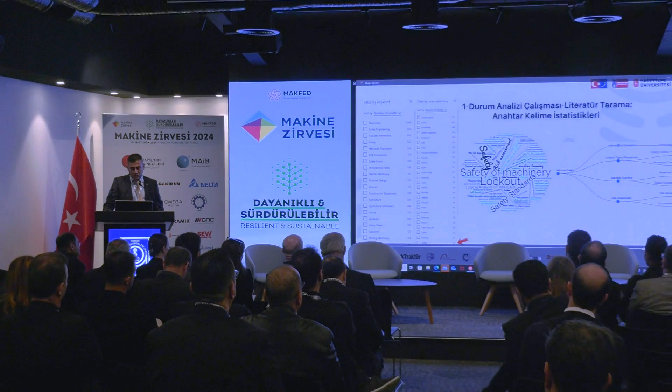Scopus verilerine baktığımız zaman makine emniyeti, emniyet mühendisliği gibi anahtar kelimelerin öncelikli olarak yer aldığını görebiliyoruz ve en fazla çalışmanın Amerika Birleşik Devletleri'nde, Çin'de ve İngiltere'de yapıldığını görüyoruz. Türkiye'de ise sadece 30 tane Scopus veri tabanına yansıyan çalışma var. Yani Türkiye'de bu konuda bilimsel araştırma anlamında çok az kaynak bulunmakta ve bu alanda çalışan kişilerin üretmiş olduğu yayın sayısı da çok az.

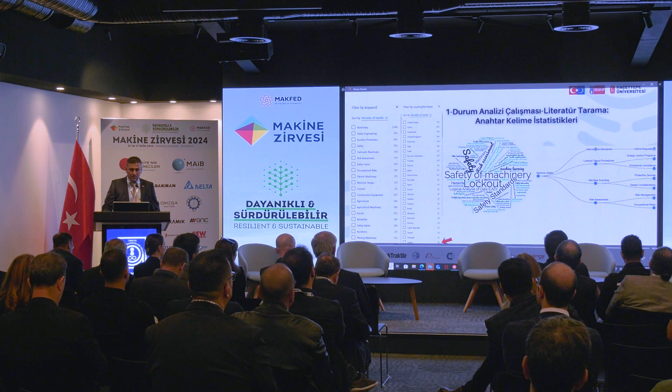Makine emniyeti başlığına baktığımız zaman mapping kısmında en çok lockout, tagout prosedürlerinin dikkat çektiğini görüyoruz ve peşinden risk değerlendirme geliyor. Yani risk değerlendirme ve lockout, tagout prosedürlerine bağlı olarak iş kazaları ya da makine emniyetinin daha dikkatli ele alınması gerektiği konuları burada dikkatimizi çeken konulardan biriydi.

Literatür taraması böyleydi. Odak grup toplantılarında da sanayicilerle yapmış olduğumuz toplantılara 21 firma katıldı. Bu firmaların %75'i üniversite mezunu, %21'i lise mezunu ve %4'ü de ortaokul mezunu katılımcılardan oluşuyordu, firma sahiplerinin eğitim durumuna göre.

Onlarla yapılan odak grup toplantısının sonucunda ortaya çıkan ana başlıklar şunlardı: Makine emniyeti konusunda sanayicide bir farkındalık var ama maalesef mevzuat bilgisi eksik. Yazılı bilgi ve düzenli eğitimlerde eksiklik olduğu ifade edildi. Çoğu firma Endüstri 4.0 ve makine emniyeti entegrasyonu konusunda deneyimsiz olduğunu belirtti. Dijitalleşmenin doğrudan katkısının sınırlı olduğu ancak eğitimle makine emniyeti konusundaki bilincin artırılabileceği ifade edildi.

Yine odak grup toplantısında firma sahipleri, butik üretim yapan firmaların Endüstri 4.0 entegrasyonunda kendilerini sınırlı gördüğünü ifade ettiler. Özellikle üzerinde durulan konulardan biri şuydu: Endüstri 4.0 iş sağlığı güvenliğini artırabilir ama önce temel iş sağlığı güvenliği problemlerinin çözülmesi gerekiyor. Eğitimin hangi türde olursa olsun önemli olduğu ama deneyime, pratiğe, görselleştirmeye, animasyon destekli eğitimle birlikte olmasının kendileri için çok faydalı olacağı ifade edildi.

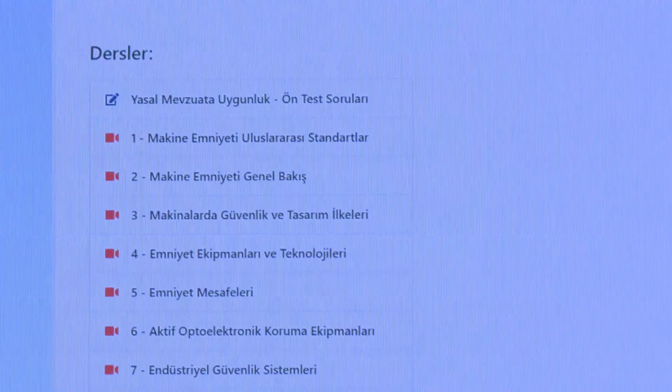Altta gözlük işareti olan eğitim içerikleri de var ama sayfa kaymıyor maalesef, internet biraz yavaş olduğu için en altta koltuklardan dolayı muhtemelen göremiyorsunuz.

Sunum kısmına geçeyim ben. Şuradaki gözlük işareti olan içerikler, bizim gerçek üretim ortamında Türk Traktör Fabrikası'nda kullanılan makineleri referans alarak birebir fotoğraf ve videolarını çekip modellemesini yapıp daha sonra oyun motorunda modellediğimiz sanal gerçeklik içerikleri. Ama buradakiler tabii ki sanal gerçeklik içeriğinin öncelikli olarak eğitim kısmı. Sonraki kısımda da sanal gerçeklik uygulamalarını alıp bireysel olarak da kullanabilirsiniz. Biraz sonra web sayfasından sanal gerçeklik içeriklerini nereden indireceğinizi ve hangi tür gözlüklerde kullanabileceğinizi de göstereceğim.

Burada şu anda eğitimi, bu örnek şu anda bizim interaktif eğitimlerden bir tanesinin ekranda videosunu görüyoruz. Makine, emniyet mesafeleri dersini anlattığımız eğitim içeriklerinden birisi. Bu da sanal gerçeklik eğitim içeriklerimizden bir tanesi.

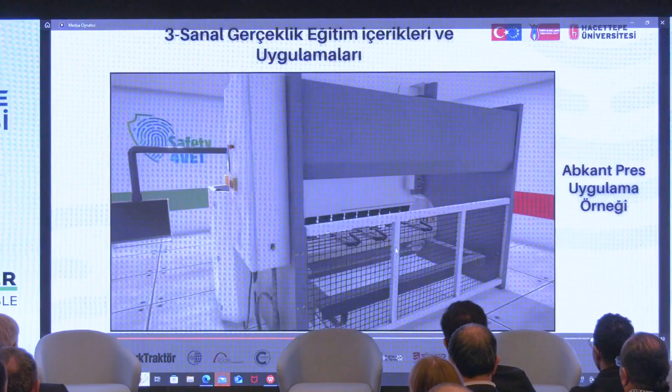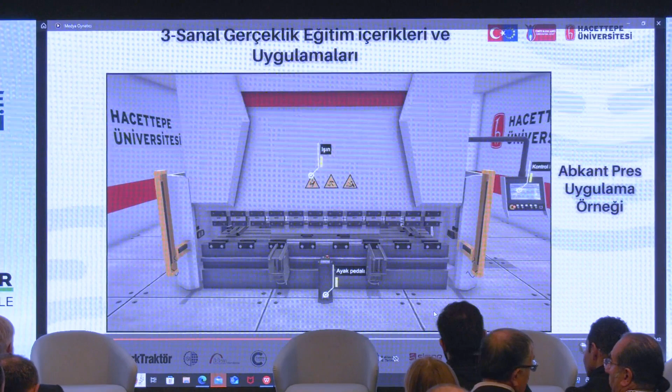Bu bir taraftan ekranda hareket ederken ben bahsedeyim. Şu an Türkiye'de üretilen Abkant preslerden birisi. Bu Abkant presin üzerinde hangi emniyet ekipmanları olması gerekir? Yine gerçek üretim ortamında kullanılan bu Abkant presin fotoğraf ve videolarını çekerek bunu bilgisayarda modellemesini yaptık.

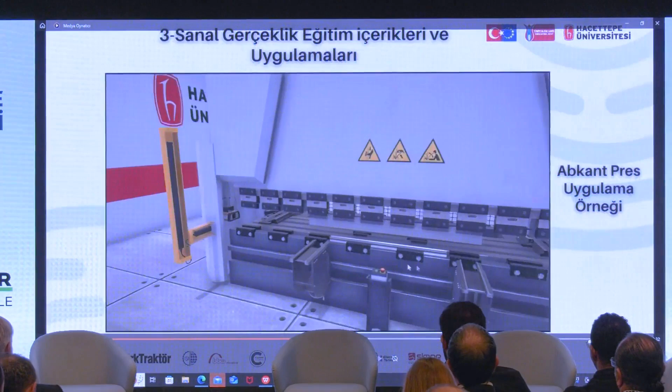Bildiğiniz üzere normalde Abkant preslerde bu şekilde ışık perdesi olmaz. Eğitim amaçlı olarak bunu biz entegre ettik. Gerçek makinede bu yok, burada gerçek makinede lazer emniyet sistemi var. Yani olması gereken bu ama biz tamamen eğitim amaçlı olarak buraya ışık perdesi de entegrasyon yaptık. Model üzerinde yaptık, üretici firmanın böyle bir entegrasyonu tabii ki yok. Ki lazer emniyet sistemi olduğu için buna da ihtiyaç yok.

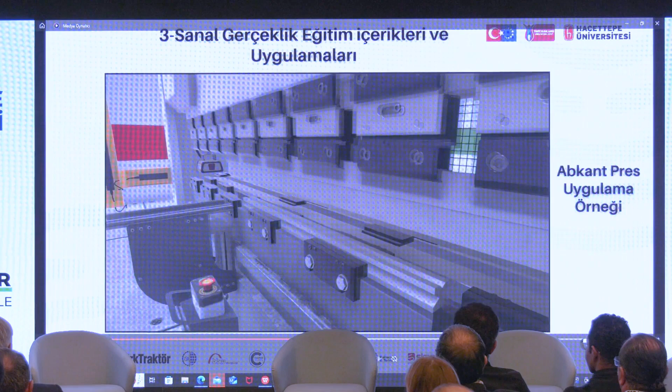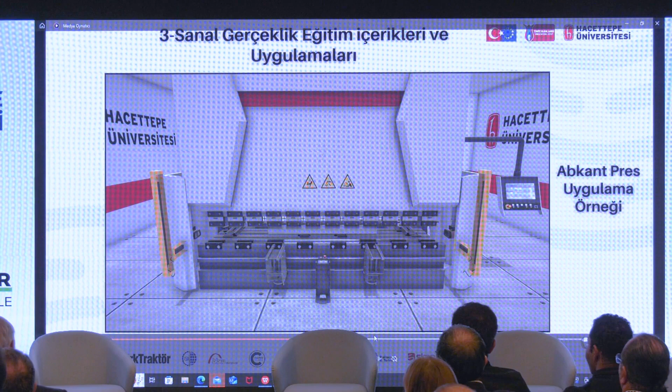Eğitim amaçlı tamamen. Dolayısıyla bu Abkant pres üzerinde daha önceki eğitimlerde bir pres makinesi üzerinde hangi emniyet ekipmanları olması gerektiğini anlattıktan sonra tekrar burada bu VR eğitim üzerinde adım adım bir daha anlatıyoruz. Hangi emniyet ekipmanları olmalı, bunların özellikleri neler olmalı ve makine üzerinde başka hangi koruyucu ekipmanlara ihtiyaç vardır, bunların hepsini bu VR içerik üzerinde de anlatıyoruz.

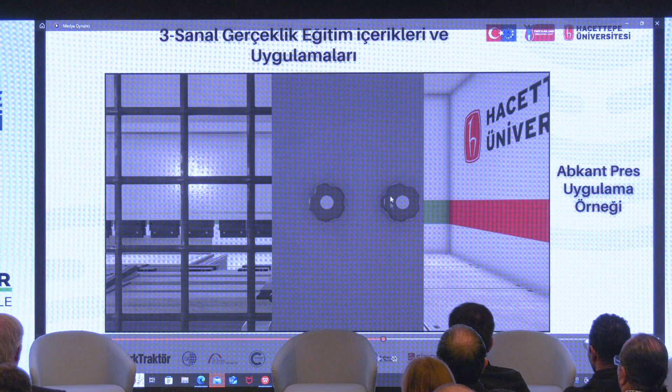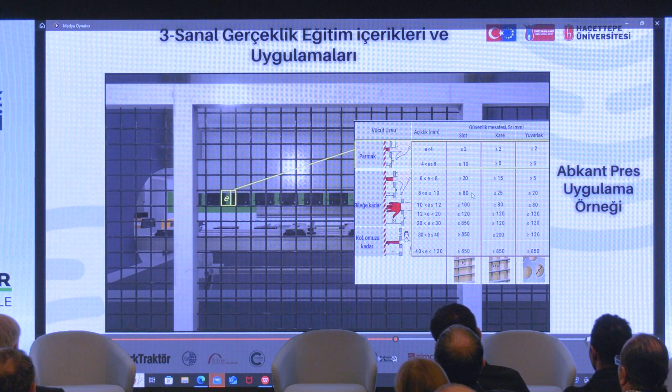Buradaki örneğin mesela bağlantı elemanlarının elle sökülemez olması gerekiyor. Bunların özel anahtarlarla ya da uzman kişiler tarafından belli ekipmanlar kullanılarak sabit bağlantıların olması gerektiğinden, makine üzerindeki tel örgü üzerindeki gözeneklerin büyüklüğünün ne kadar olması gerektiğine, renklerinin koyu olması gerektiğine kadar bütün detayları bu eğitimler üzerinde kullanıcılar görebilir.

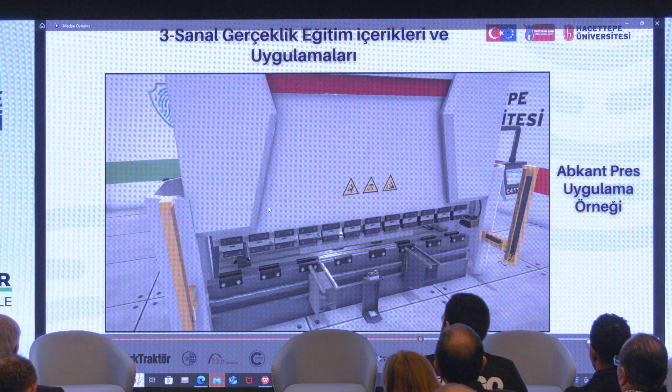Burada mesela bu Abkant pres üzerinde bu kapağın üzerinde kullanılan koruyucu ekipmanın gerçek üretici firma tarafından aslında yanlış kullanıldığını yine bu eğitimler sırasında biz görmüş olduk. Sizler de makine emniyeti alanında çalışan kişilerin hemen fark edebileceği bir şey.

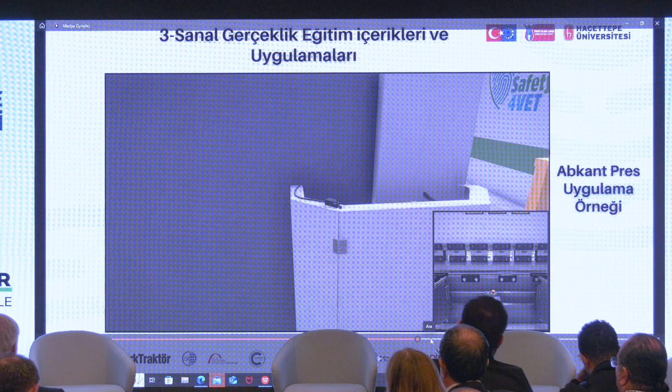Mandallı switch kullanılmış örneğin burada. Kullanılmaması gereken bir emniyet ekipmanı. Evet var ama aslında burada yanlış bir emniyet ekipmanı. Bu çünkü kapağı açtığında işçi orada bakım yaparken diğerine 'hele bir bas bakalım mandal çalışıyor mu' diyebilir. Aslında da makine emniyet basılı konuma gelebilir. Dolayısıyla aslında bu üreticinin yanlış bir emniyet ekipmanı seçtiğini burada görüyoruz. Yani bu emniyet ekipmanı burası için uygun değil. Biz de direkt makinenin üzerinde olduğu için birebir onu modelledik, yani doğrusunu eklemedik buraya.

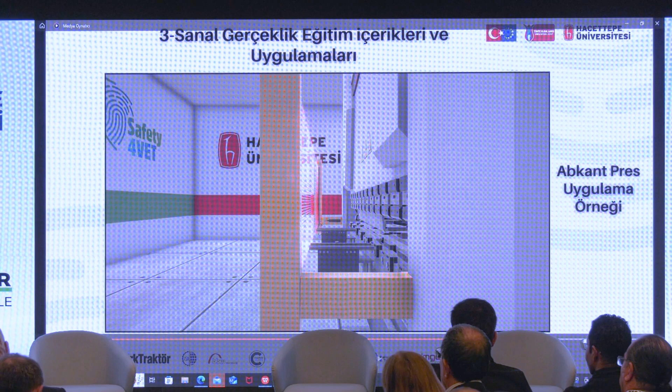Dolayısıyla elimizde bu şekilde şu anda 4 adet, endüstriyel robot için, Abkant pres için, hidrolik pres için olmak üzere 4 adet. Bir de etiketleme, kilitleme, lockout tagout prosedürlerinin anlatıldığı bir VR eğitim içeriğini bu proje kapsamında geliştirdik. Şöyle biraz daha hızlandırarak geçiyorum.

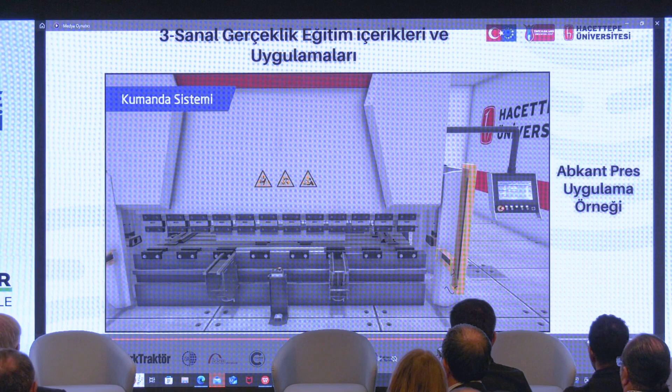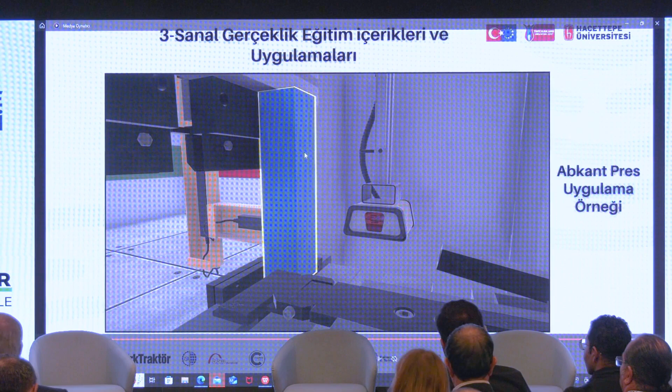Bildiğiniz üzere İstanbul'da bir kaza yaşanmıştı. Hatırlarsanız 14 yaşında bir çocuk bir preste boynu sıkıştı ve hayatını kaybetti maalesef. Aslında o haberlere internetten herkes ulaşabilir. Habere baktığınız zaman haberde yazan açıklamayla aslında olayın gerçekleşmesinin kesinlikle aynı olmadığını düşünüyorum. Olayı görmedim, hiç güvenlik kameralarında izlemedim. Tamamen kendi yorumum. Haberlerde yazdığına göre çocuk pedala basmış ve presin altında, oradaki başlığın altında kafasının kaldığı yazıyor.

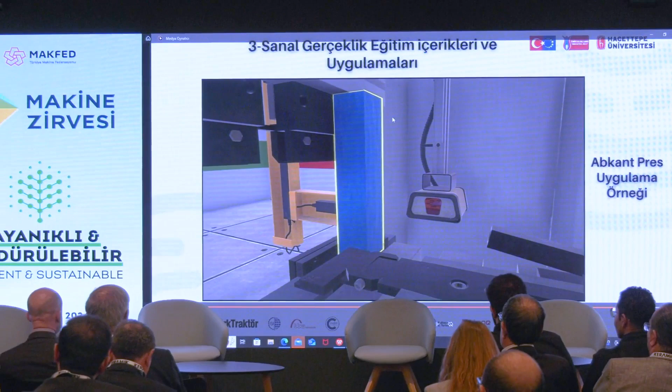Boynunun kaldığı yazıyor. Oysa oradaki temel problem bence Abkant preste bir hidrolik kaçağı var ve şu şekilde bir mekanik koruyucuyu çocuk koyması gerektiğini bilmediği için kendi ağırlığıyla inen bir başlığın altında kaldığını düşünüyorum. Aslında çok basit bir emniyet tedbirini, çocuk tabii ki bilmez ama başındaki usta muhtemelen çocuğu uyarmadığı için böyle basit bir uygulamadan dolayı çocuğun hayatını kaybettiğini de biliyoruz maalesef.

Bundan dolayı bu tür yaşadığımız örneklerden dolayı işte hep eğitim tarafı unutulmaması gerekiyor. Buradaki bu zirvede tartışılırken de, bu konular konuşulurken de mutlaka eğer bu zirvenin sonunda bir rapor yazılacaksa akademiye yönelik de bir rapor yazılması gerekiyor. Eğitim sistemine, üniversitelerde, mühendislik eğitiminde makine direktifi, yeni yayınlanan makine direktifi konusunda eğitim verme ile ilgili de bir başlığın eklenmesi gerekiyor.

Daha önce yapmış olduğumuz bir projede yapmış olduğumuz bir araştırma vardı. Makine sektöründe çalışan dezavantajlı gruplarla ilgili, bilmiyorum belki birçok kişi ilk defa duyacak. Ben de açıkçası meslek hayatım içerisinde bu projeyle ilgili çalışırken öğrendiğim bir konu. Geç öğrendiğim konulardan bir tanesi.

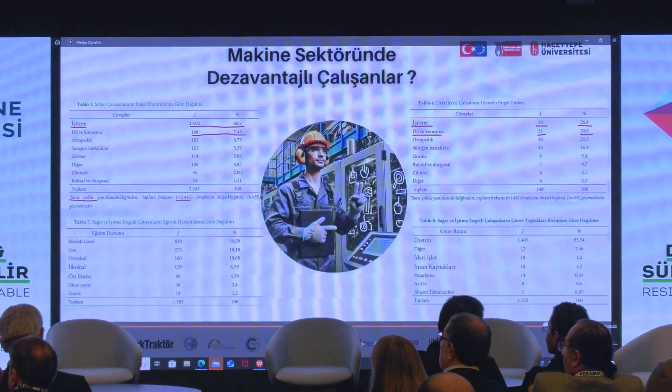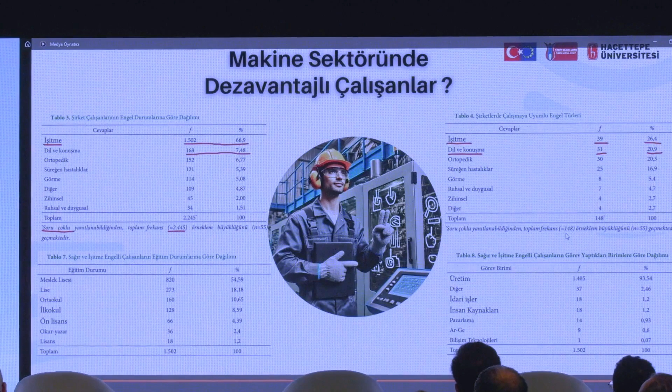Biraz önce oturumun açılışını yapan Şirin hocamız, kendisi erişilebilirlik uzmanı. Cumhurbaşkanlığında erişilebilirlik kılavuzunu yazan hocamız. Bu alanda Türkiye'de çalışma yapan nadir hocalarımızdan bir tanesi. Özellikle sağırlar ve işitme engelliler üzerine çalışma yapıyor. Bir önceki projede de biz Şirin hocamla birlikte çalışmıştık ve orada MESS de proje ortağımızdı.

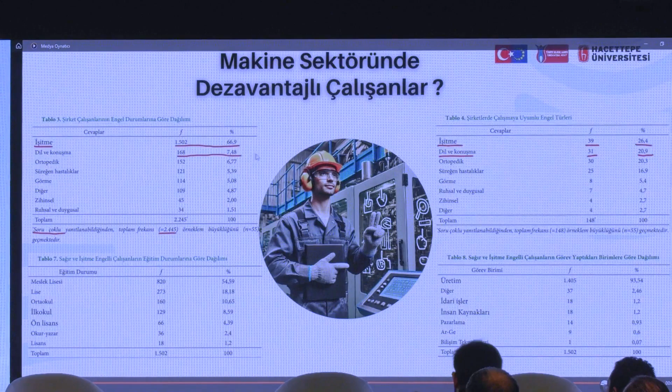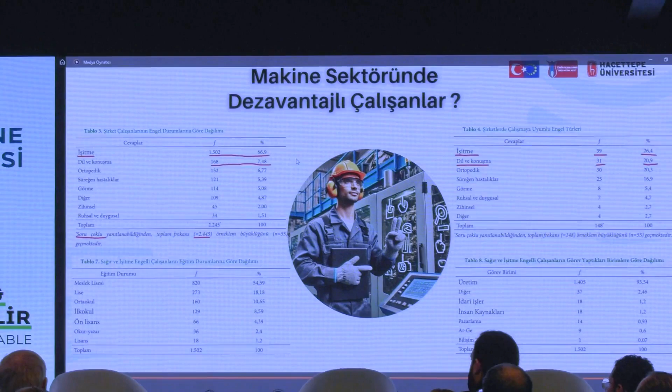MESS üyesi şirketlerde yapmış olduğumuz anketlerde şunu görmüştük. Sektörde biliyorsunuz yasa gereği %3 engelli çalıştırılması gerekiyor. Genelde sektörün yüzdelik oranlarına baktığımız zaman yaklaşık %74, %75 gibi sağır ve işitme engelli çalışanları tercih ettiğini görüyoruz. Dolayısıyla burada dikkate alınması gereken önemli faktörlerden bir tanesi de yine eğitim boyutunda sağır ve işitme engellilere yönelik de eğitim içeriklerinin hazırlanması gerektiği.

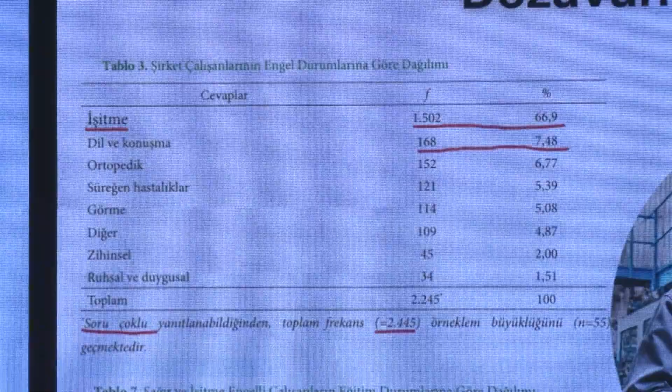Yani onların anlayabileceği dilden illa bir işaret dili çevirmeni kullanmak gerekmiyor. Hazırlanan içeriklerin erişilebilir olması gerekiyor, görsellerinin çok fazla olması gerekiyor ki Şirin hocam bu alanın uzmanı. Ben onun alanında çok konuşmak istemiyorum.

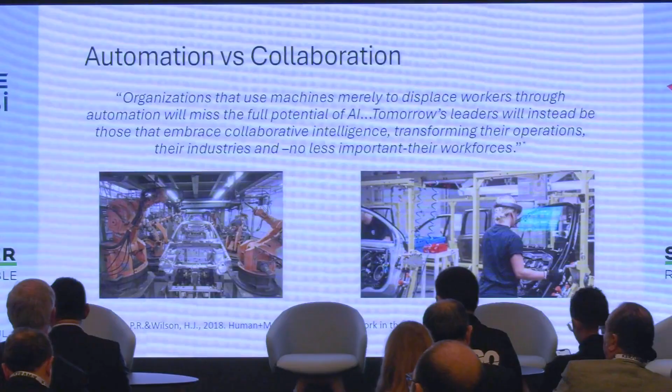To begin with, today I would like to bring about an important distinction between automation and collaboration, as people tend to get confused. As you might have seen in the past, many factory floors have actually integrated automation to a greater extent today. Everything from soft drink manufacturing to car manufacturing is highly automated.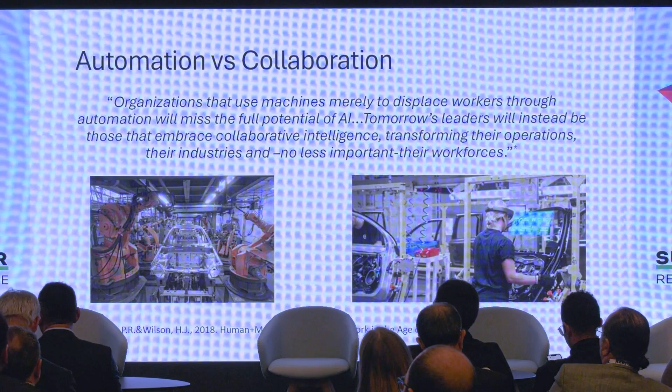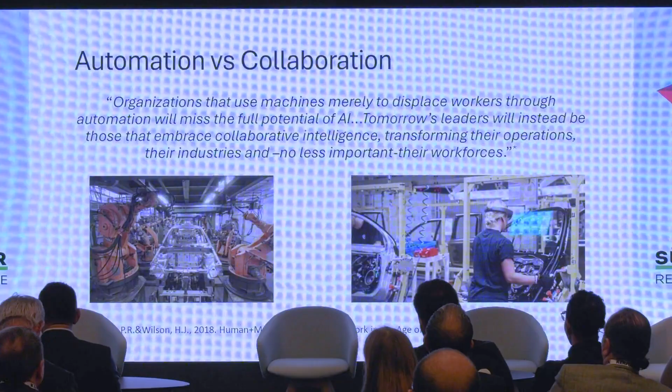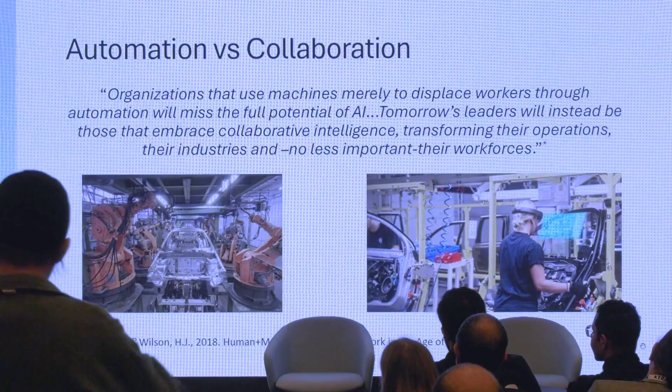However, many organizations that use machines simply to displace workers are going to completely miss out on the potential use cases of implementing artificial intelligence. So I'm taking this quote by Dr. Daugherty: tomorrow's leaders will instead be those who embrace collaborative intelligence by transforming their operations within their industries and also their workforce. That's an important contribution that AI is going to make.

So what is collaborative intelligence? It's basically a human-centric approach where the AI assists human beings in many scenarios. In this case, we're looking at industrial and manufacturing plants where you use robots, not necessarily to replace them completely, from A to Z.

So what is the human contribution here? Often, as you might have seen, humans train these robots for particular tasks. They collate the information required to ensure these robots are useful on the factory floor. Human beings try to explain factors that are counterintuitive to decisions that are often reported, and also sustain a safe environment for robots or automation to thrive in. So that's three important key factors here.

So I was just mentioning human beings' contributions. What is the contribution of AI here? Basically, it's to take that and amplify the effects of human beings into the real world environment. So you have many use cases here.

One could be interactions, so you can build interactions at multiple levels. In the factory floor, you're trying to build a collaborative environment with human beings and robots together, and also trying to embody some of the AI into the workforce itself. You can see the individual here using an exoskeleton. This literally improves productivity and also ensures safety in terms of repetitive stress and other factors at play in the workspace.

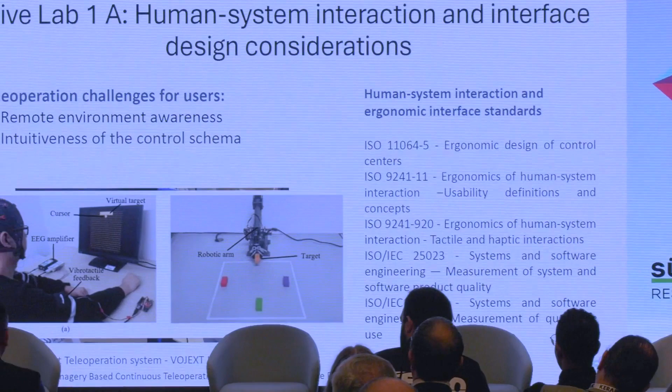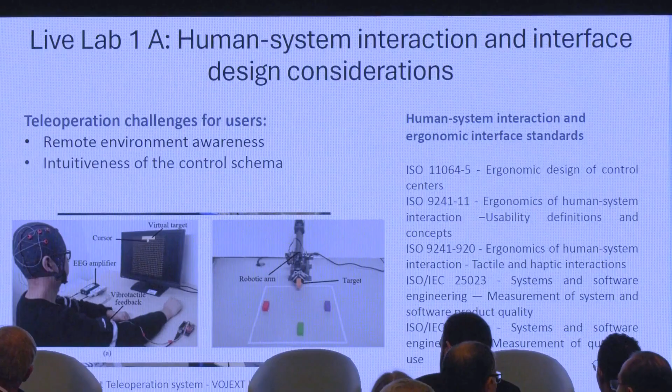Just to quickly dive into what my team members and colleagues all together do inside our labs. In this case, we have a human interaction design setup, looking at the consideration in terms of the interface design, how the human being responds.

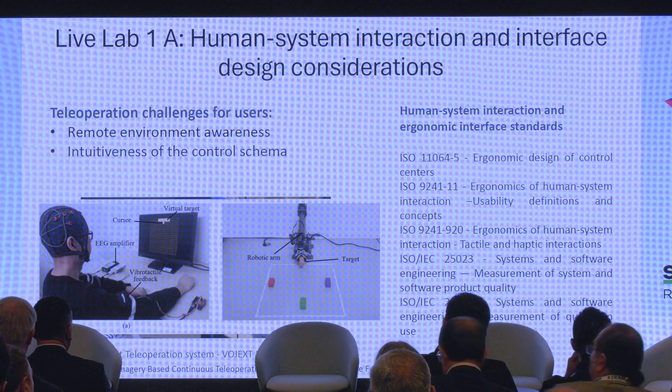You can see the pictures here where there's a teleoperation challenge. We often bring in volunteers and give them challenges via teleoperation setup. Again, some of these experiments are informed via the standards, so we use some of these standards to inform our design of experiments.

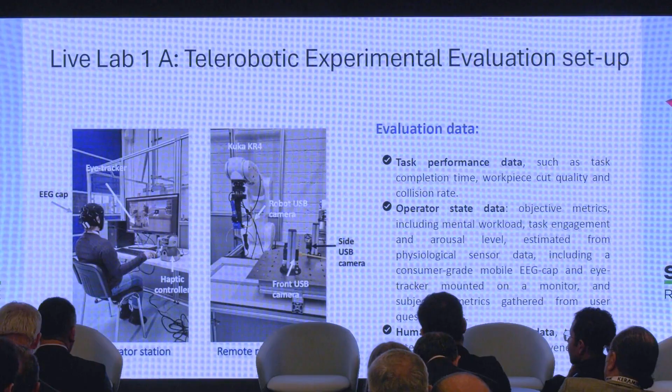Another setup here, looking at this image, you can see what kinds of data we are trying to evaluate in that particular setup. You have task performance data with regards to how fast the task is completed, what is the quality of the end workpiece, and are there collisions or other issues.

Looking at the state of the operator, is he fully engaged with the cobot or collaborative robot here, as you see. Looking at other metrics like mental workload, and physiological measurements like EEG and other important body parameters.

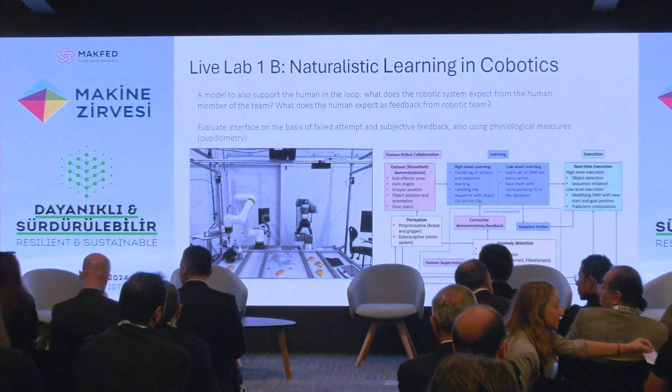Again, we look at human-system interaction, the efficiency of the design in terms of how seamless the interaction is between the collaborative robots and human beings. We're trying to design experiments that can build a more naturalistic learning for robots or cobots here.

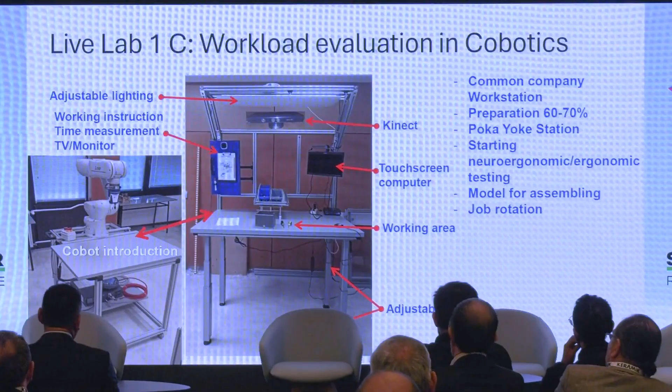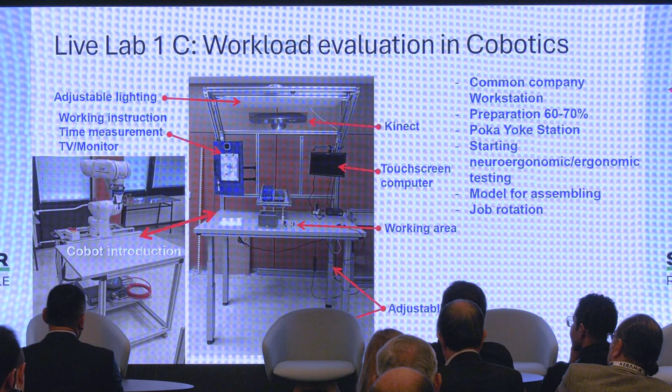We're also evaluating how the workload is for the user of the entire workstation. You have a workstation, a user coming to the desk, and we're using different sensors and cameras to evaluate how engaged the worker is, and also looking at workload factors with different assessment criteria. One example is the human-guided assessment level, physical workload assessment factors, and cognitive workload factors. There are several factors considered in the design of the entire setup.

I'm running fast because I've been given a timeline.

Another important research area is use of reconfigurable robots. We are based out of Ireland, and we have a strong manufacturing sector contributing to 37% of the GDP. Often we have low volume, high mix manufacturing tasks, and tons of SMEs catering to this market alongside large MNCs within Ireland. The business model flexibility doesn't offer them much leverage in terms of buying robots or the latest and greatest robots all the time.

So we come up with a solution, borrowing from academic and other research robotic solutions, highlighting some of the state of the art in robotics. What we try to do is use behavioral cloning and imitation learning, teaching robots through a learning-from-demonstration kind of approach.

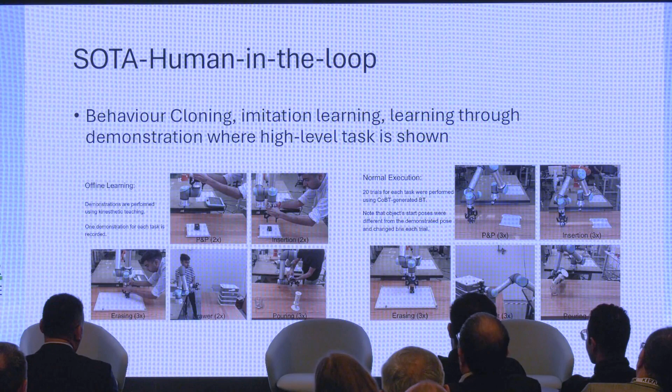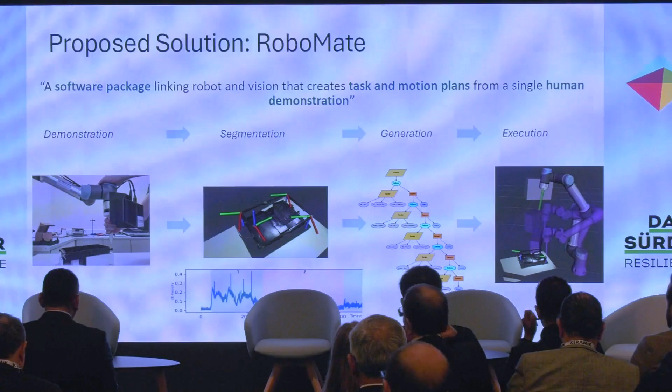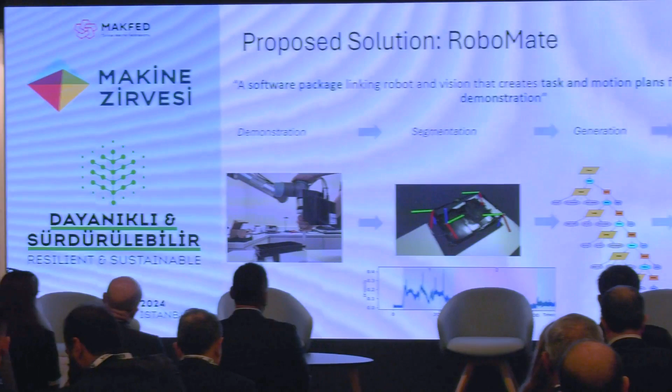So what we propose is RoboMate, a software package solution. We're trying to link robot and vision together with task and motion planning, basically teaching the robot in a single demonstration rather than hundreds of demonstrations. This makes the robot reconfigurable, so you can use the same robot for multiple tasks—let's say 6 or 7 tasks within the same OEM or company. So we've designed this, and some of the setups and processes...

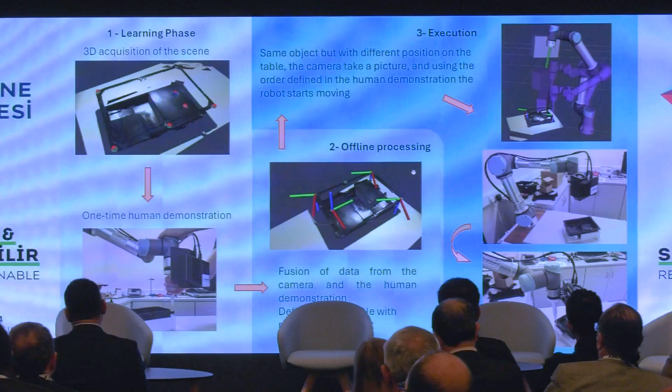We've managed to get feedback from industry, and they've shown that one of the key factors here is the computer vision or machine vision part. We use a 3D vision camera embedded on top of the collaborative robot—sorry, it's on an incline here—that's a critical factor of this cobot. The sophistication of the machine vision algorithm also plays a major factor.

Another part is task planning and also the safety aspects, which is an important contribution of TUW in this particular project. There's an ever rapidly changing landscape in terms of safety for machinery, and with the introduction of collaborative robots into this picture more and more, there's a necessity for designing interaction from the very beginning with cobots.

To summarize, at least at the policy level, SMEs need to be encouraged to invest in more collaborative solutions. There needs to be development of collaborative intelligence between these kinds of use cases.

To quickly summarize, it's important to have a thriving manufacturing sector in any growing economy like Turkey or a mature economy like Ireland. Collaborative intelligence, I believe, is a solution to ensuring robust manufacturing sector growth in the long term, because there's an aging workforce in many countries and you need some substitution, if not some assistance, from these technologies.

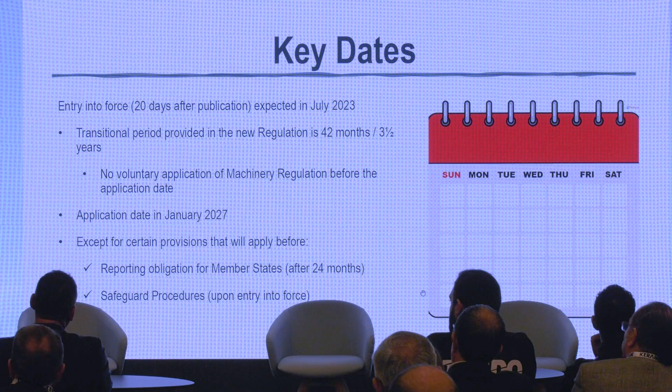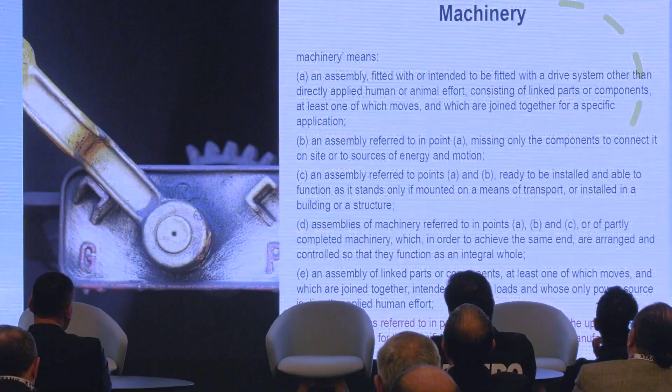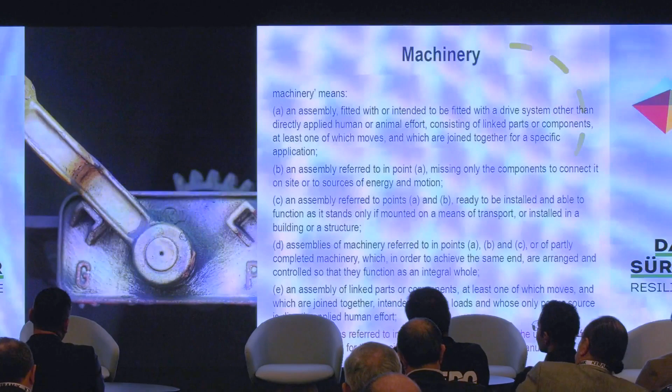Okay, we start with the machinery. The machinery definition remains more or less the same as before, changing only the last line, the red line. I will show just this line where the definition mentions IoT technology, which wasn't present in the past. This means that in the new machinery regulation, the European Community focused their attention on IoT technology inserted in the machinery.

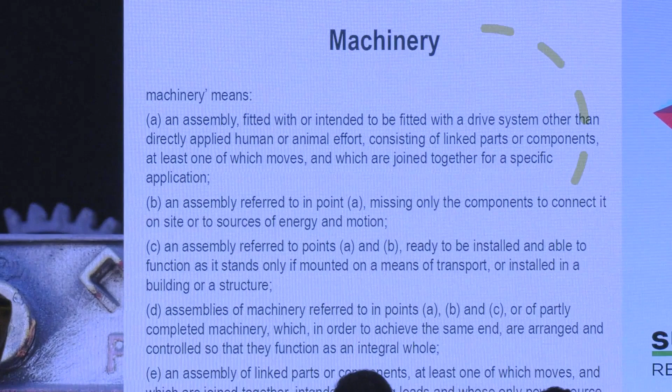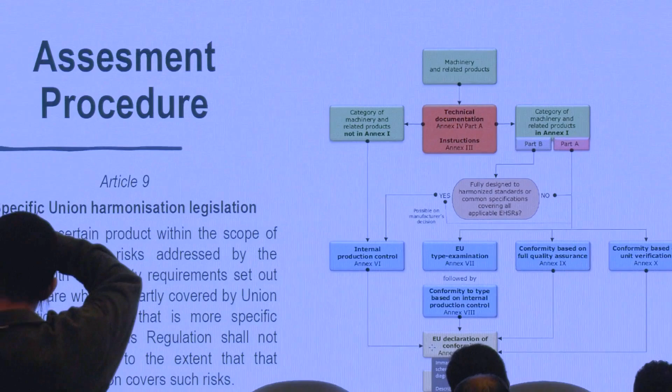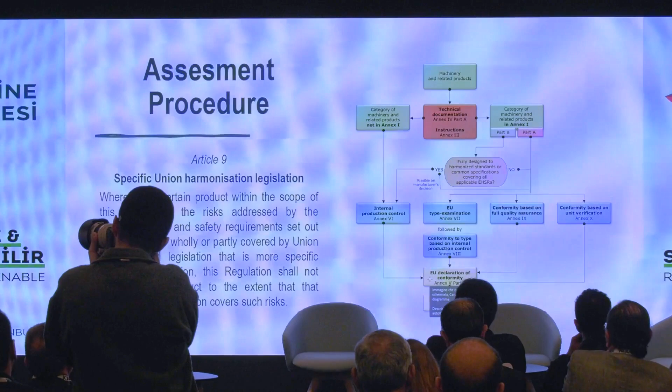The assessment procedure is this one. It's complex, with different paths for application. There exist two different categories of equipment: one present in Annex 1 and one not present in Annex 1. But pay attention: Annex 1 is not an exhaustive list of the equipment that can be applicable. In other words, Annex 1 can in the future be modified by the European Commission to insert new technology that brings high new risk, or to remove some technology that has shown its risk is not relevant, based on technological and scientific advances in knowledge.

For this reason, we have equipment that can change over time. Pay attention to that. In case the equipment stays in this category, there is a complex assessment procedure. But if a harmonized standard is present that takes into account all the risks of this type of technology, we can use the simplified line, the same as for simple equipment.

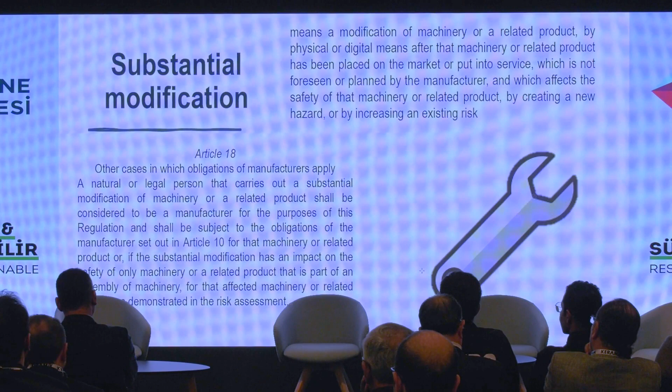Another new introduction in the new directive, in the new regulation, is the concept of substantial modification. That means if someone buys a machinery and modifies it, introducing a new risk or hazard, increasing the risk, for example by removing some safeguard or something like this, whoever modified the machinery becomes the new producer, assuming all the obligations of the new producer.

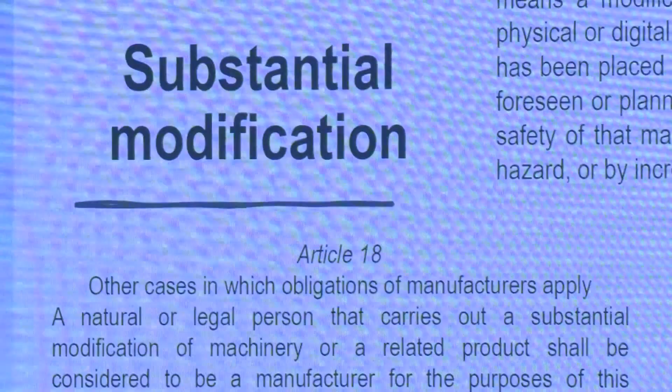This is a new change. How can we guarantee the safety of the components of our machinery with the new regulation? With the use of safety components, just as present in the past directive. But what happened, what is included now in the safety component?

Now software appears. We can use software as a safety component with the new regulation. But pay attention, when we use software for safety components, we need to guarantee their availability, reliability, and effectiveness. It's not sufficient just to say I have a software. We need to guarantee all these parts, the same as with a physical barrier.

For guaranteeing machinery safety, the new regulation requires a series of essential health and safety requirements. This is more or less what was already present in the past directive, but now new essential health and safety requirements appear that I won't focus on in detail.

For example, now in the health and safety requirements, artificial intelligence is also inserted. One example is this: the requirement guarantees health and safety also for adaptive machinery that evolves itself during operation, and this evolution cannot bring more risk. We need to guarantee this as well.